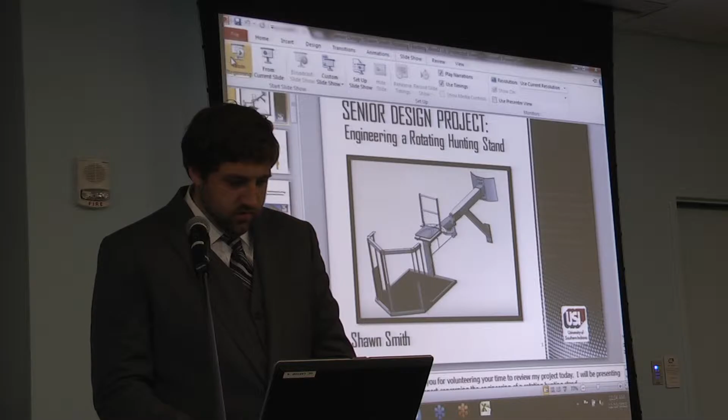You guys will have to forgive me. Public speaking is not my favorite thing to do. I'll start over. My name's Shawn Smith.

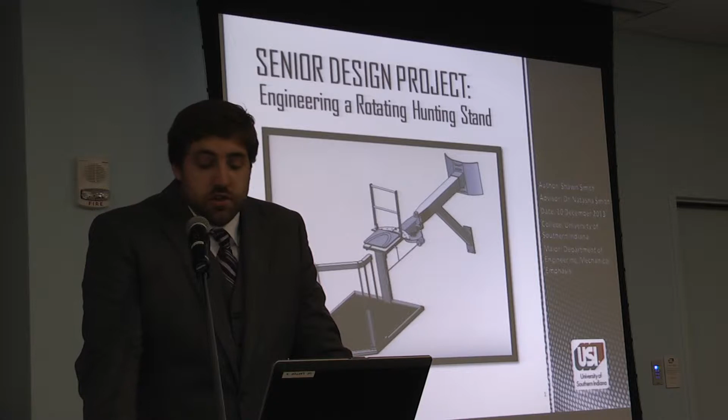I'll be presenting to you today my senior design project concerning the engineering of a rotating hunting stand. My advisor is Dr. Natasha Smith.

Before I begin, I'd like to thank a few people, in particular God, who has helped me get to the point where I am, my parents, Dave and Jolene Young, whose care and support has helped me achieve this level of success, my grandparents, in particular, Linda Goodwin, whose care and support has helped me reach the pinnacle where I am. I'd like to thank the University of Southern Indiana.

In particular, I'd like to thank Dr. Natasha Smith, my advisor, who graciously donated her time and efforts even though she was overworked to help me create the best project that I could.

I'd like to thank Dr. Julian Davis, who volunteered his time and materials to help me create this project. I'd like to thank Dr. Zane Mitchell, who spearheads the engineering department, and Donna Moore, who keeps the engineering department running smoothly.

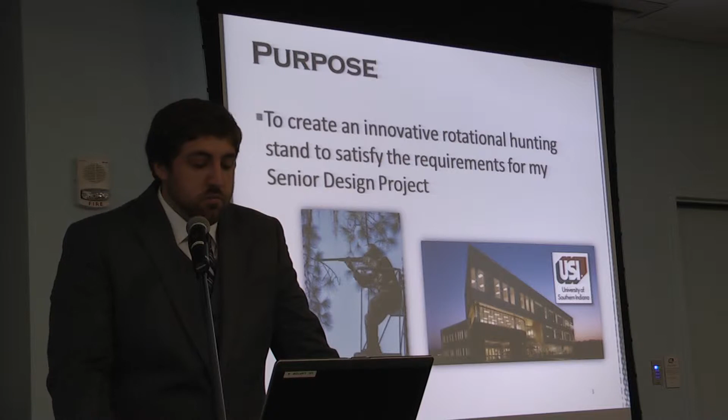So the purpose of this report is to create an innovative rotational hunting stand to satisfy the requirements for my senior design project. Throughout this report, I'll review the objective, background concerning the report, the problem, designs to solve the problem, analysis of those designs, a budget and risk of the design, and a conclusion.

So the objective is to create a hunting stand that can rotate around a tree, thus creating a larger field of view. This increases the hunter's odds of being in the right position when the deer comes. What inspired me to create this report was my extensive experience with machine design and fabrication through Toyota Boshoku of America and Hurst Manufacturing. Additionally, my time here at USI has been primarily dealing with machine design. I'm also an avid hunter, and I've been hunting since the age of 11.

So some background. Each year, nearly 10 million individuals participate in deer hunting. These hunters spend approximately $10.7 billion on hunting-related gear. Arguably, the most crucial piece of hunting-related equipment is the hunting stand, as it positions the hunter up in the tree, away from the deer's line of sight, thus concealing them.

The reason they do that is deer are cunning creatures. They're always alert, and they have unique behavior that varies based upon temperature, barometric pressure, seasonal changes, and all kinds of other variables. Deer stands give hunters an advantage over the deer. One drawback with the current design of most deer stands is that they're stationary.

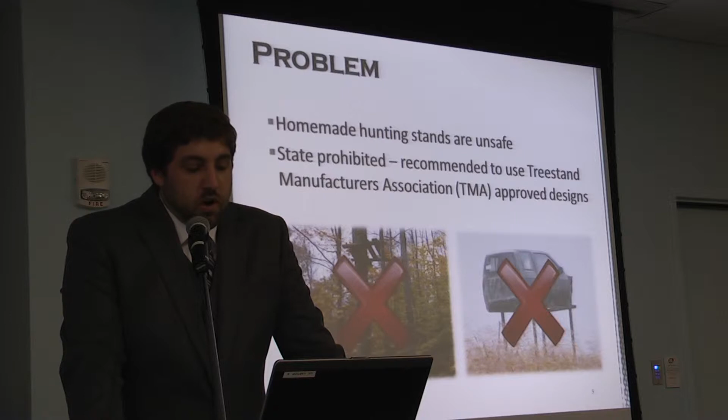These here are just a few of the deer stands that hunters tend to use. The most popular is probably the homemade hunting stand, which is just assembled from parts that are lying around—in this case, a couple pallets and an old pickup.

States are now prohibiting these types of deer stands. They are recommending that you use TMA approved designs, which is the Tree Stand Manufacturers Association.

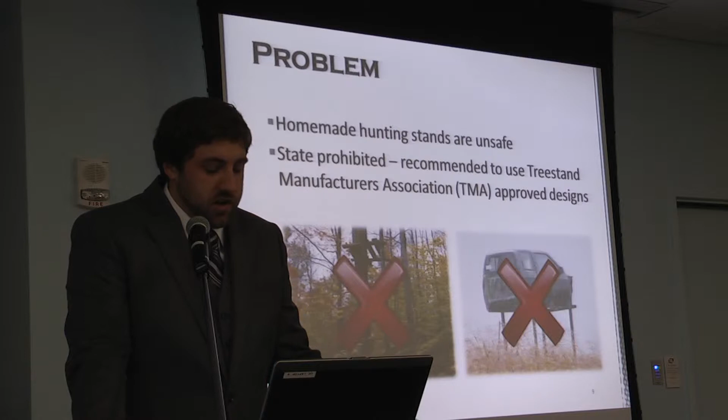So my solution is to create a safe, reliable tree stand that can be rotated around a tree, thus giving a better field of view and greater versatility.

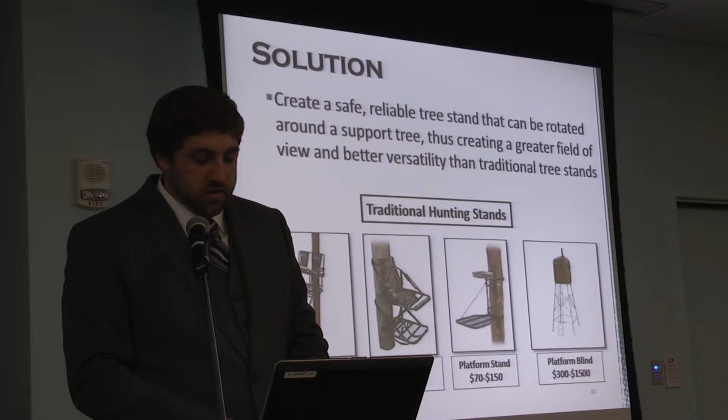The Revolution faces the hunter inward towards the tree, so it's like you're constantly playing a game of peekaboo with the deer. The Johnson 360 tree stand has a swiveling seat that can swivel 360 degrees, but at the same time, the supporting tree and other foliage still blocks the hunter's view.

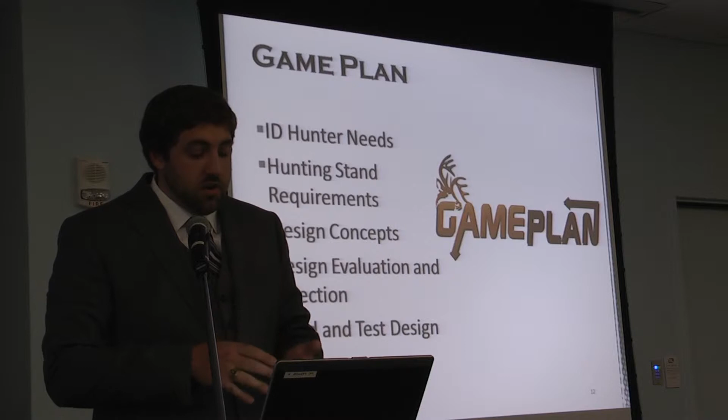My game plan to create this rotational hunting stand: first, identify the hunter's needs, from which I will gather the hunting stand requirements. Then I will create design concepts, evaluate those designs, select one, and then build and test the design.

So, hunter's needs: a hunting stand should be safe, easy to access, provide a greater field of view, economical, quiet, comfortable, and versatile.

Based upon this, I established that the hunting stand should weigh no more than 175 pounds, should be capable of resisting a 350-pound load so a guy like me can actually use it, and should not have a deflection of more than half an inch. It should be capable of 270 degrees of rotation and mountable to an average tree, which I deem to be 24 inches in diameter.

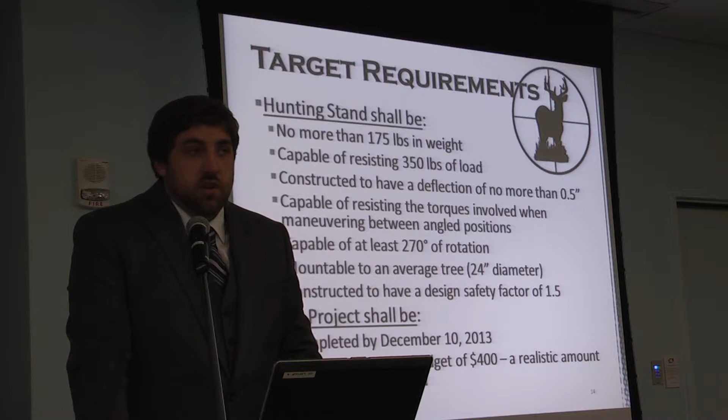The actual recommended tree size for deer stands is 12 inches or greater, but to be on the safe side, I said 24 inches. The whole design shall be constructed to have a design factor of safety of 1.5. The project itself should be completed by December 10th with a budget of under $400, which I deem to be a realistic amount for a student.

My first design, which I deem the circular railing system, consists of an I-beam which a seat platform will ride along, kind of like a monorail, and the seat will be able to rotate around the tree 360 degrees.

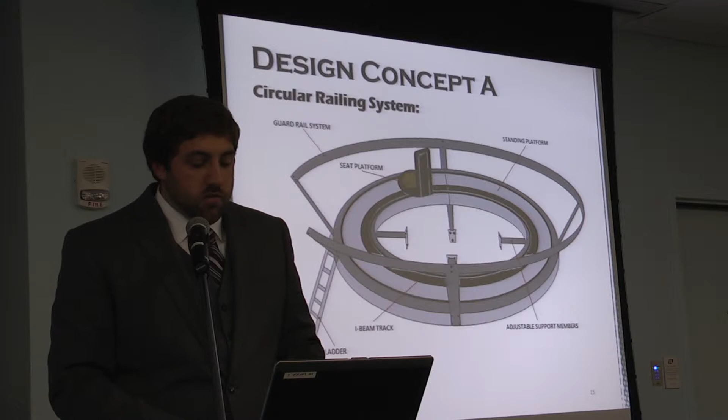It'll have adjustable support members to match the tree's diameter. It will come equipped with a guardrail system and a standing platform as well.

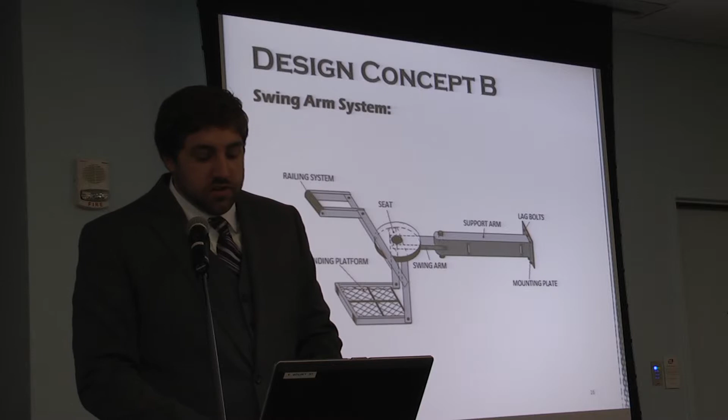Design B, which I deem the swing arm system, consists of a support arm which will be attached to the tree, a swing arm which will be pinned to the support arm via a pin connection, and then a seat with a standing platform and a railing system which is attached to the end of the swing arm.

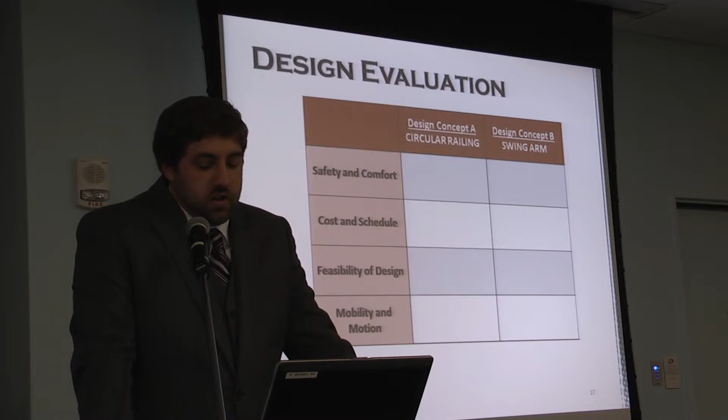I then evaluated each of these two designs based upon four criteria: safety and comfort, cost and schedule, feasibility of the design, and mobility and motion.

Since both designs have been attempted before but never fully achieved, I said that safety and comfort could technically be achieved for both. For cost and schedule, I believe the swing arm would be easier to do since I have experience with cantilevers.

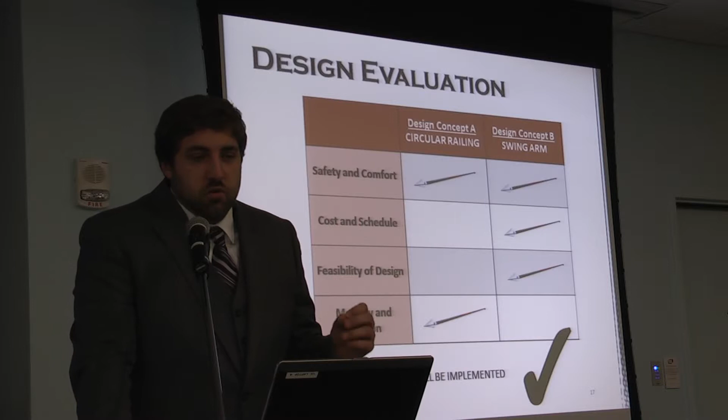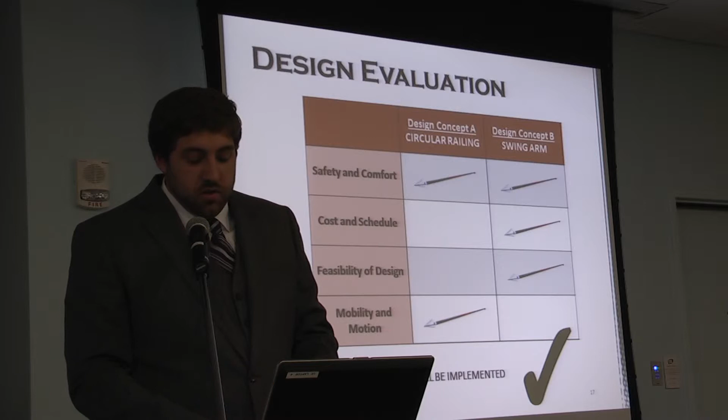For feasibility of the design, once again, because I have experience with cantilevers, and because most hunters would view the swing arm design as a typical hunting stand design in appearance, I gave it the edge on feasibility. For mobility and motion, I deemed that the circular railing system would be easier to operate for the hunter. Based upon this analysis, I selected the swing arm design to be implemented.

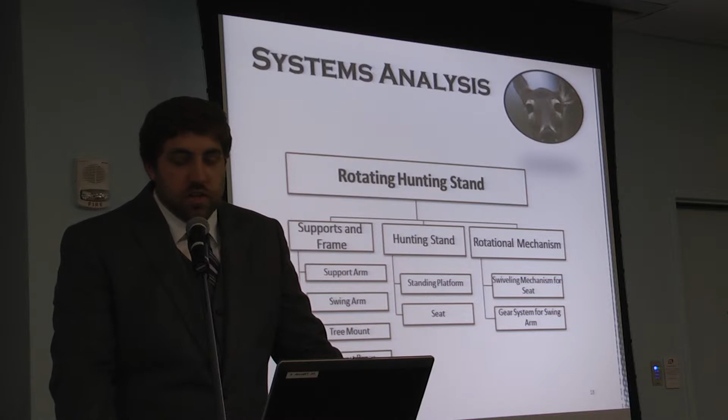I then created a systems analysis. As you can see here, I broke down the rotating hunting stand into three separate systems: supports and frames, the hunting stand, and the rotational mechanism, which will be used to move the hunting stand.

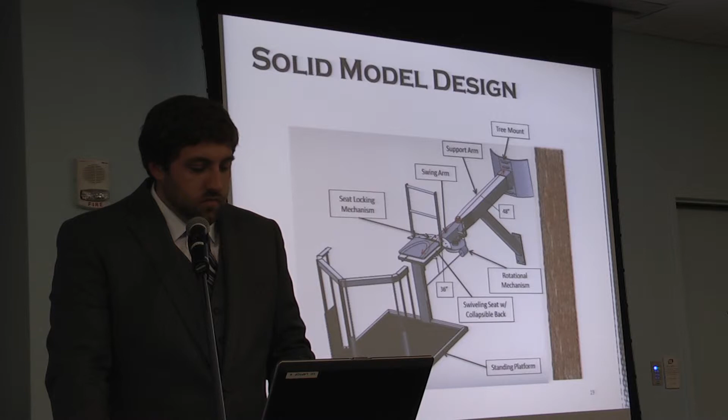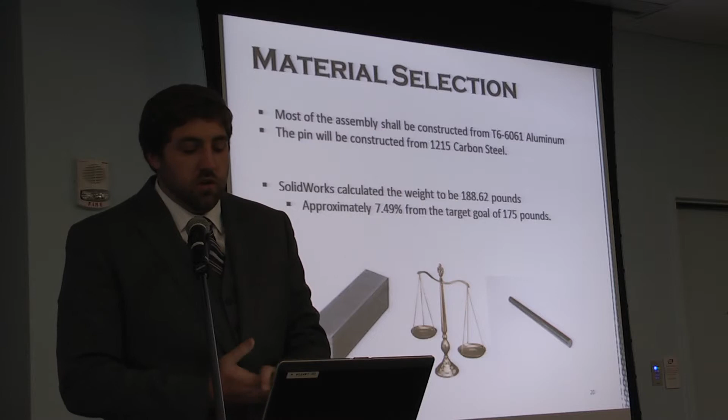Most of the assembly will be constructed from T6 6061 aluminum alloy. The pin itself, because it's much smaller, needed to be created from something much stronger, so I selected 1215 carbon steel. SolidWorks calculated the weight to be 188.62 pounds using these materials, which is approximately 7.5% from the target goal of 175 pounds.

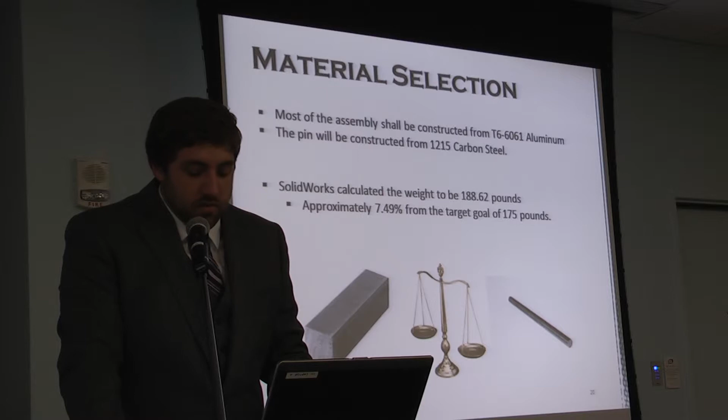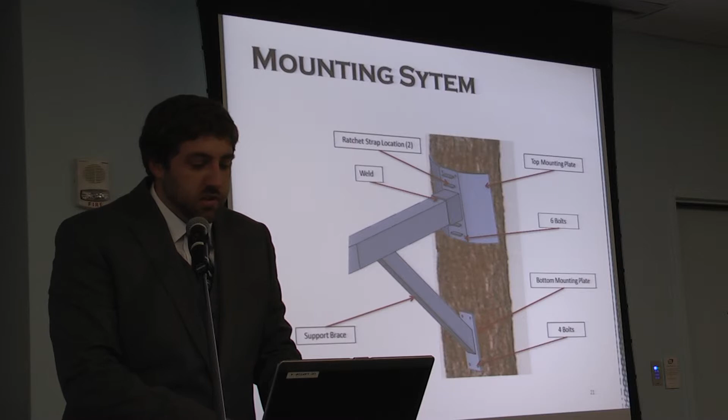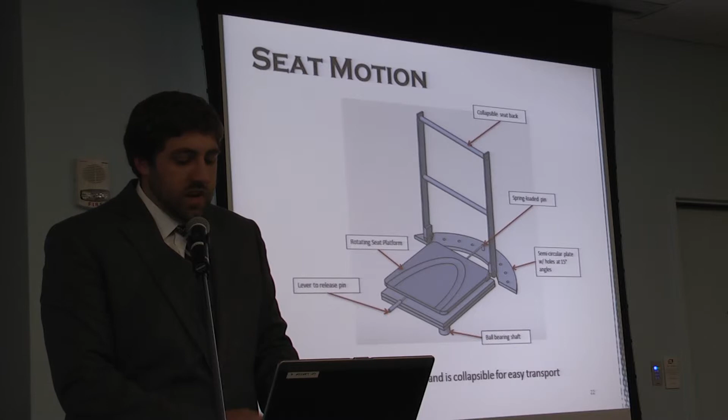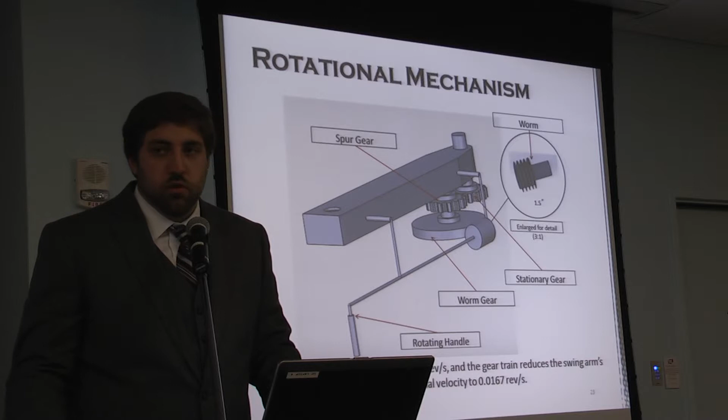And then the rotational mechanism. The rotational mechanism will consist of a worm gear with a worm, a rotating spur gear, and a stationary spur gear. I deemed that the hunter would rotate the handle at 1 revolution per second. This will produce 1/60th of the rotational velocity.

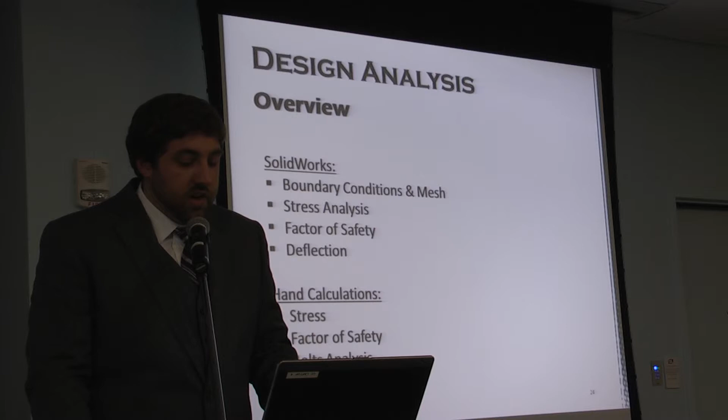So for my meshing constraints in the SolidWorks model, I fixed all of the bolt hole locations, and then I applied a 350-pound downward vertical load at the end of the swing arm. I checked each of my 3 separate angles, which I deemed to be 90 degrees, 45 degrees, and 0 and 180 degrees. I checked all of those for mesh convergence.

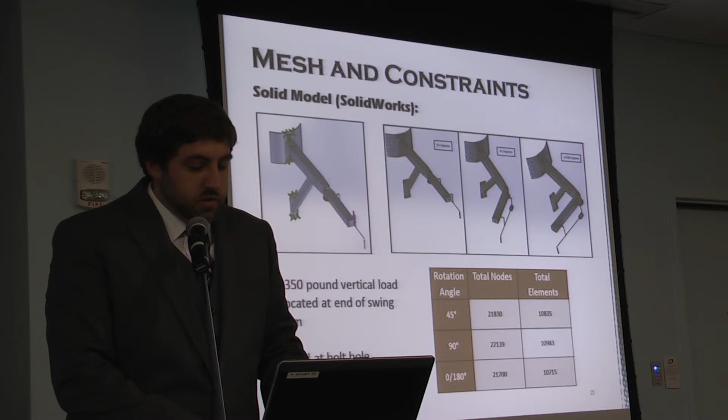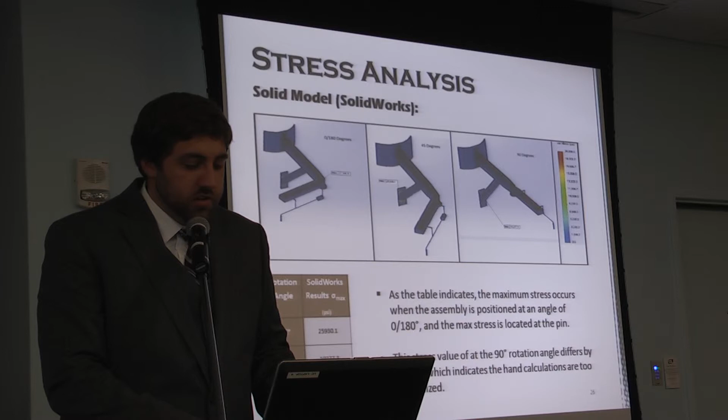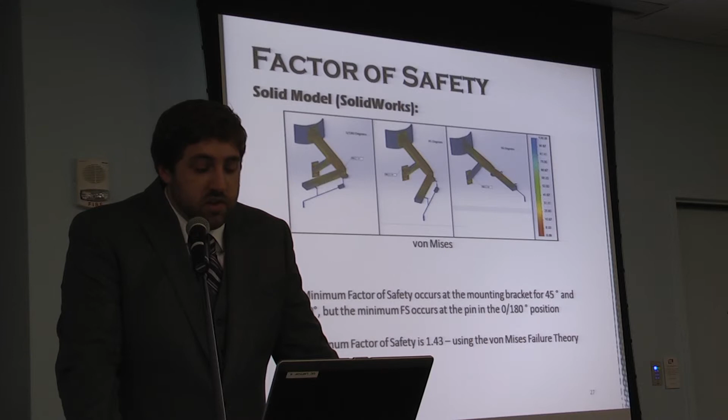I then performed my factor of safety analysis. This is a few images of the factor of safety using a von Mises failure theory. As you can see here, the red areas indicate areas that are at or near the minimum factor of safety, which in this case turned out to be 1.43. I then compared all of the factor of safety calculations to my hand calculations for SolidWorks.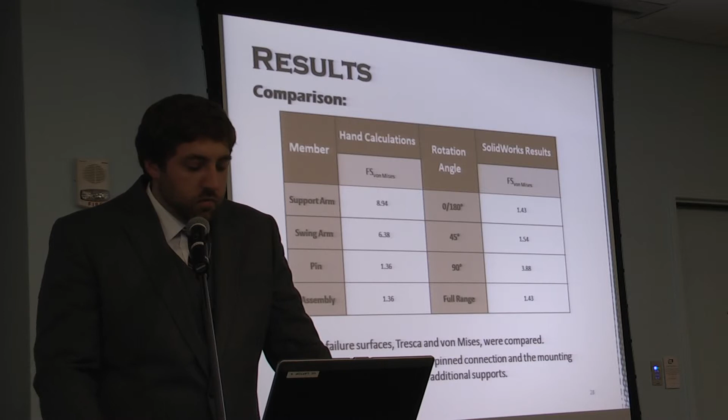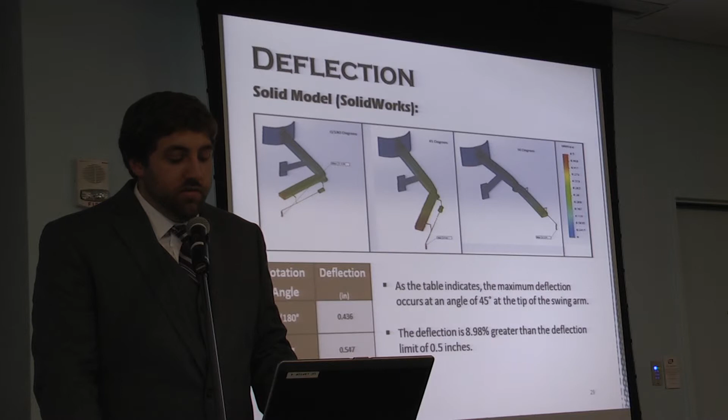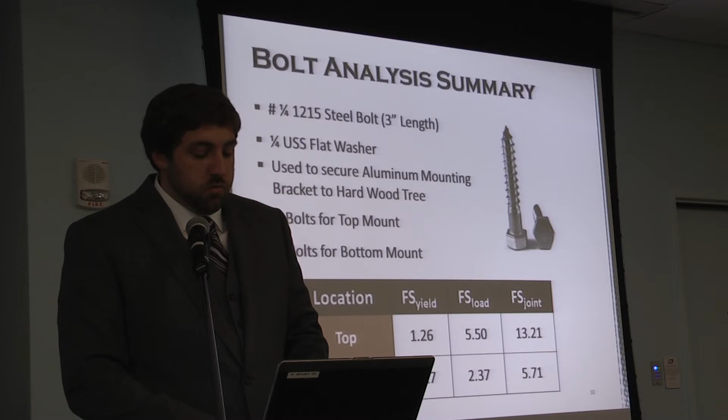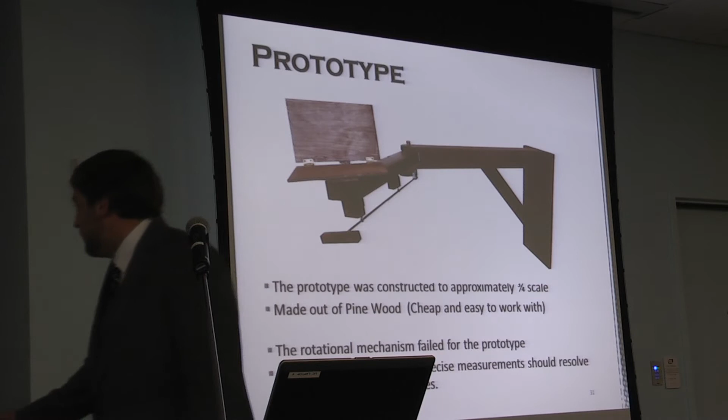After I found that my design was feasible, I began to create my prototype. The prototype was constructed to approximately 3/4 scale. It was made out of pine wood, mainly because it was cheap, easy to acquire, and easy to work with. The prototype works as far as the swiveling, but the rotational mechanism doesn't work. The main reason for this is that the pieces used to create the rotational mechanism were plastic, and the tolerances done to create this weren't precise. I'm not a master woodworker, so we'll put it that way. But if I was going to make this out of metal, I'd be able to have it machined, and it would probably work. Future prototypes will have to be created to ensure that.

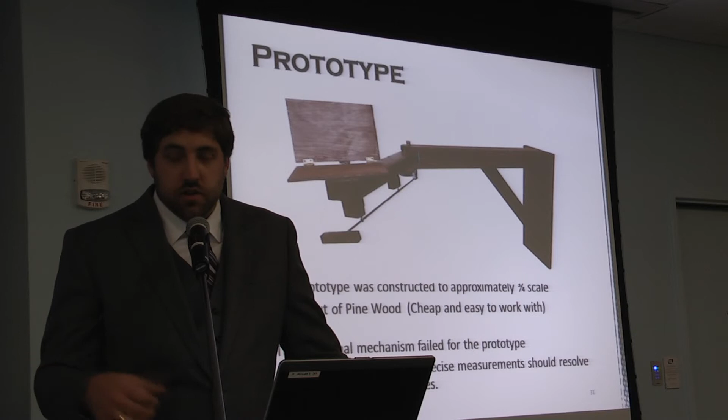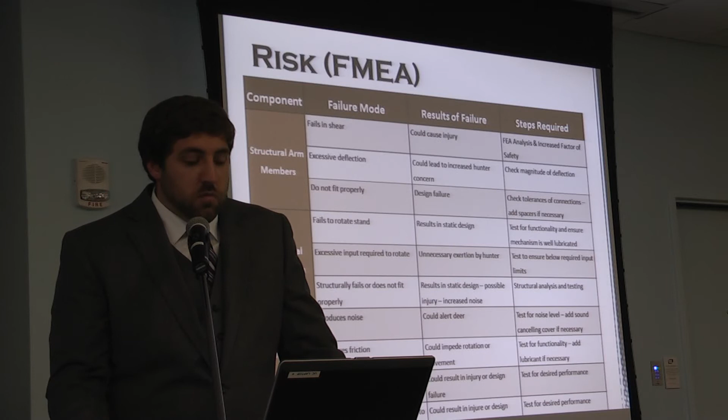I then performed a failure modes and effects analysis of the design. As you can see here, I have several components, their failure modes, results of the failure, and steps that I've taken to ensure that the failure doesn't occur.

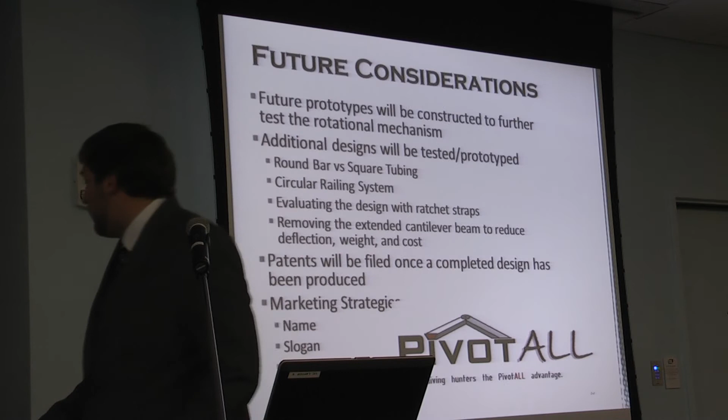I'll evaluate the design using ratchet straps rather than bolts, or a combination of ratchet straps with teeth. And then I'll also examine removing the extended cantilever beam to reduce the deflection, weight, and cost. The portion I'm actually talking about is this portion here that extends past the support brace.

Once I've created a completed design, patents will be filed, and then a marketing strategy will be created. I actually came up with a name and a slogan, PivotALL, giving hunters the PivotALL advantage. I made that in paint, I'm pretty happy with that.

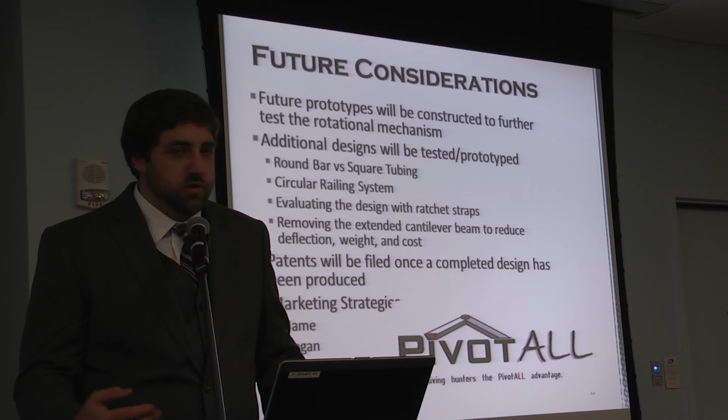As far as my clients go, I want to pursue extreme hunters, people who spend a lot of money, they have extreme passion for the sport. This includes hunting ranches or just shows that have hunters on them.

Conclusion. So based upon my analysis, the design is feasible. As you can see here, the stress was below the yielding limit for aluminum. The safety factor needs a little bit of work. It's 1.43, whereas my required safety factor was 1.5.

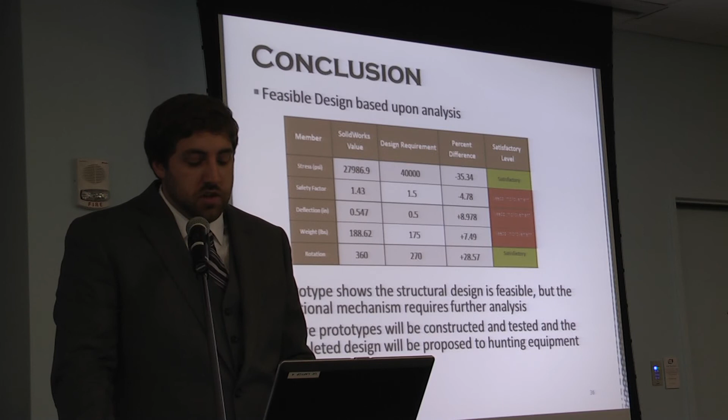The deflection was also pretty close to what I intended to achieve, 0.547, where the requirement was 0.5 inches. And then the weight was slightly over the 175-pound limit as well. The prototype shows that the structural design is achievable, but the rotational mechanism needs work. Future prototypes will be tested and the completed design will be proposed to hunting equipment companies.